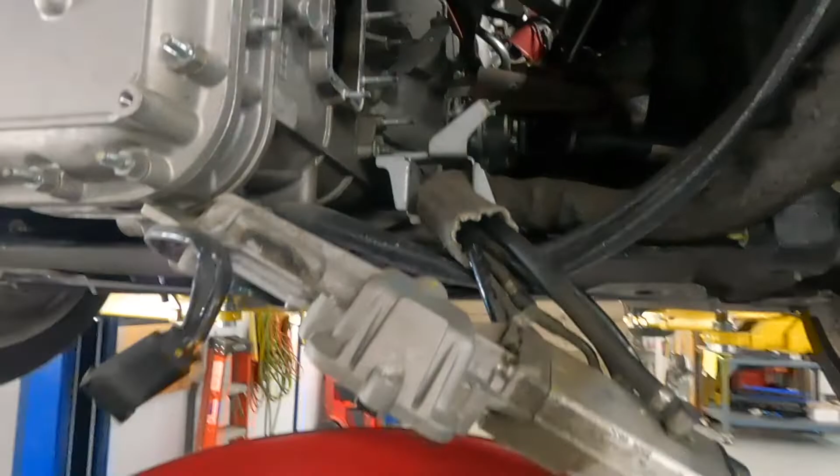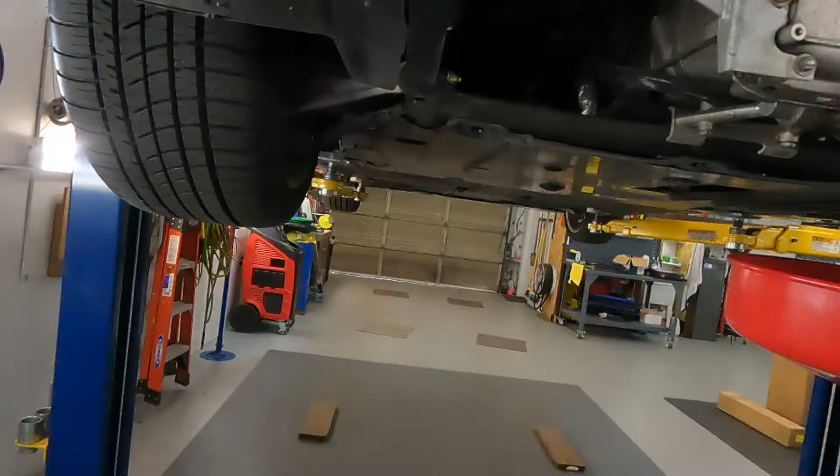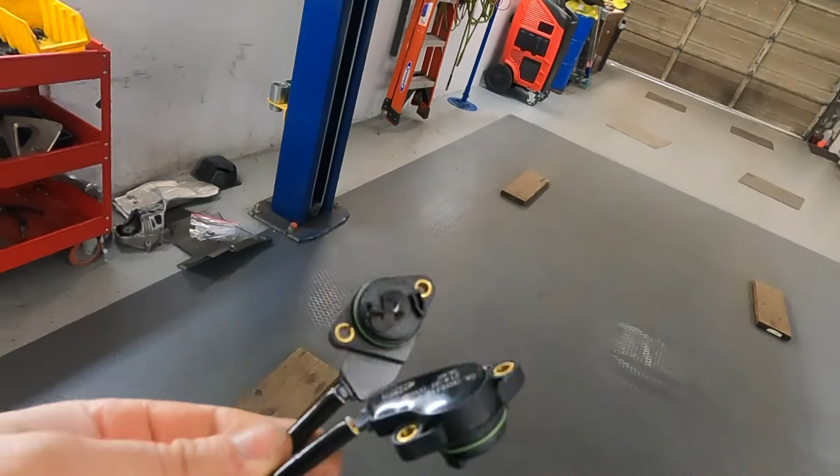Finally we got the part. Here's the parts, part number 248095. Let me unpack. And here's how it looks. Here's the kit, and here's the two new potentiometers. Now I need to take out the old one and then install the new one.

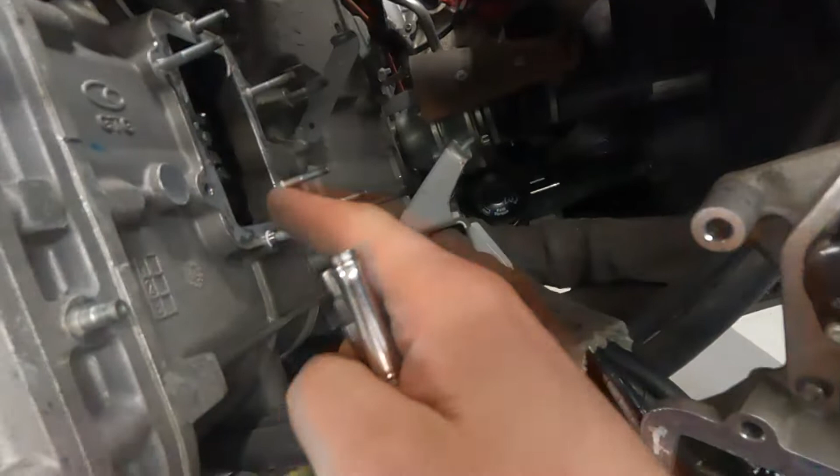Now it's time to clean this surface and this one, apply silicone and tighten the actuator to the transmission. Potentiometer, how I can... Potentiometer? Potentiometer, okay. It's already in.

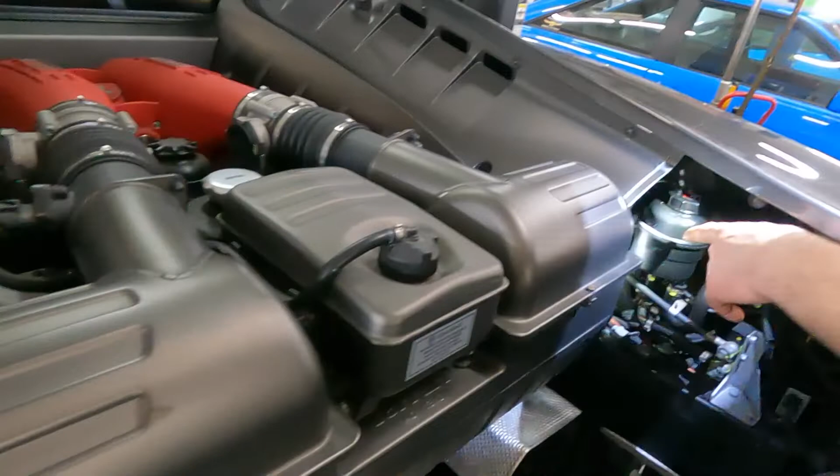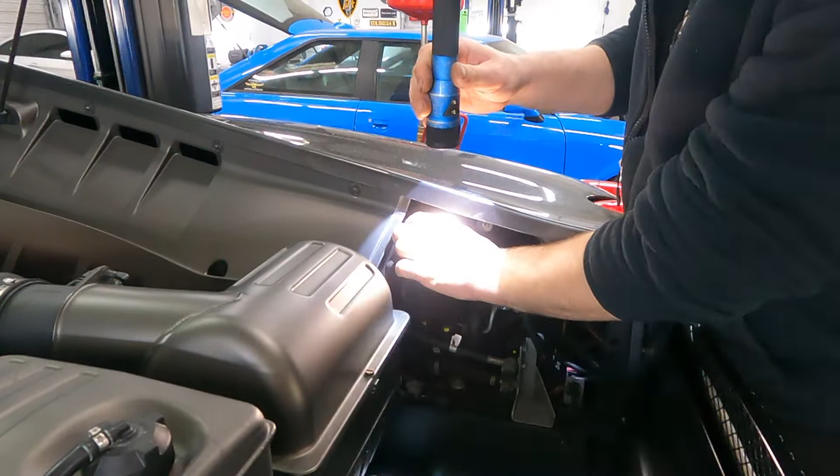Now I would like to show you guys how to do an F1 fluid flush and how to adjust the level properly. Okay, go to this side. Let me show you the reservoir. This is the reservoir. The car has been sitting since this morning. Yeah, we moved that car in the morning. Now it's been sitting about 6 hours. And let's see the fluid level. I see this is wet all around. The fluid is a little bit up.

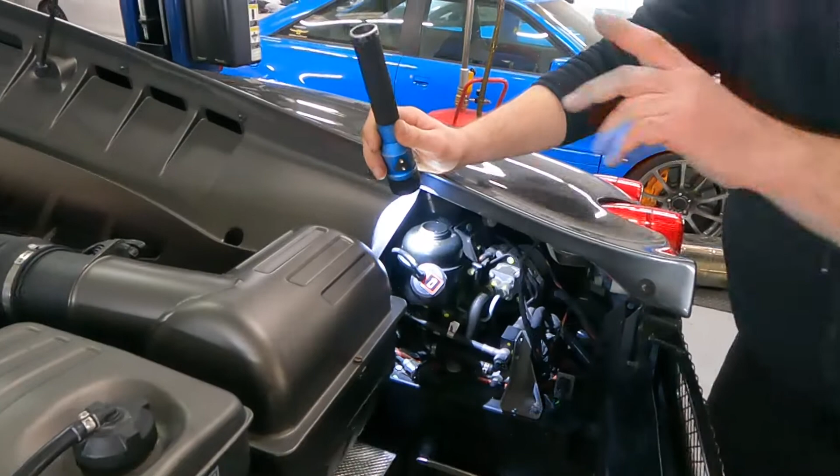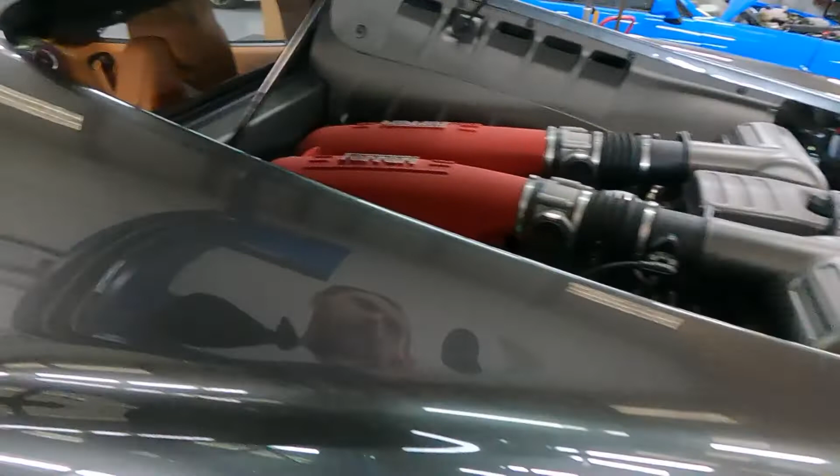Oh, yeah, you can see this. For me, it's too much. This is not the right level. But let's open the door. Let's open the door. Ilya, somebody came to you. Let's open the door and check the level after the pump starts reaching pressure. Just open the door. Yeah, this is too much. I see that it's too high a level.

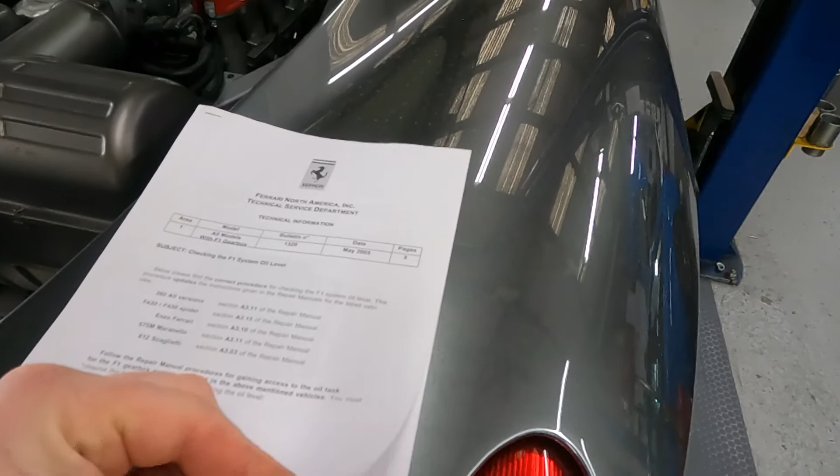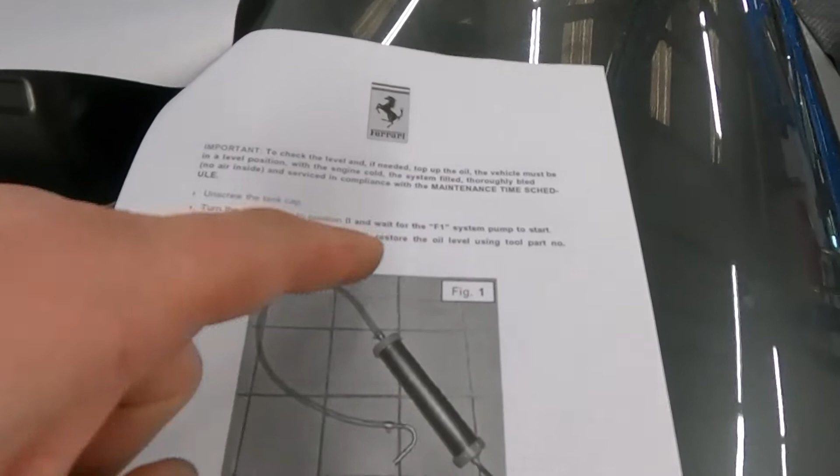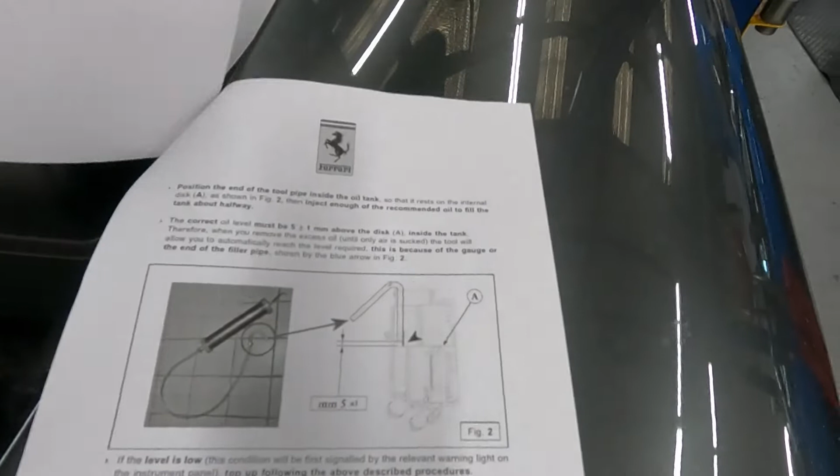Just like I printed the procedure, checking F1 system oil. In Europe they say oil, but we say fluid. Okay, unscrew the tank, turn the ignition key to position II and wait until the F1 system pump starts. Soon after the pump has turned off, restore the oil level using the tools. And here is the level. Oh, just let me fix these things. Yeah, here is the level, guys.

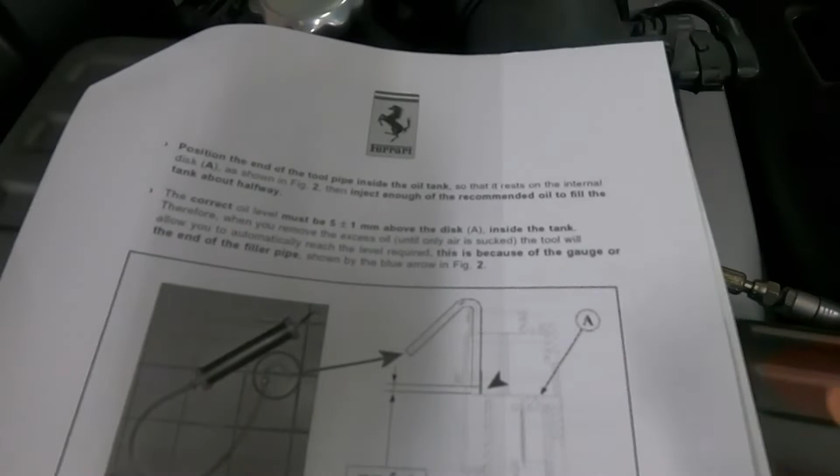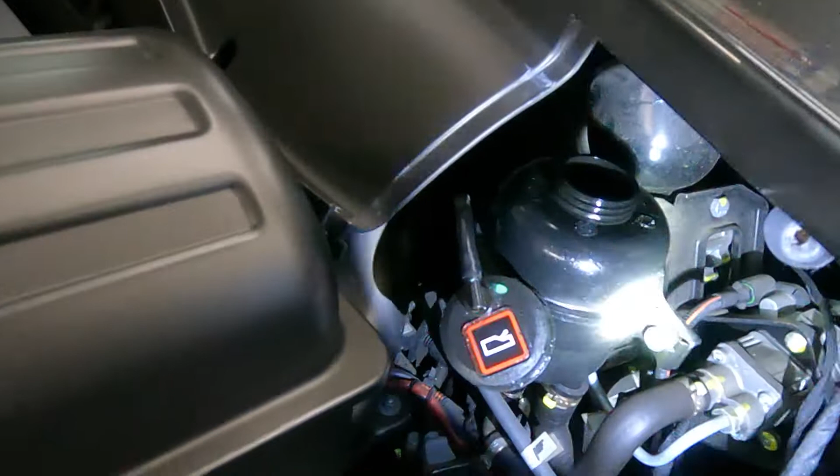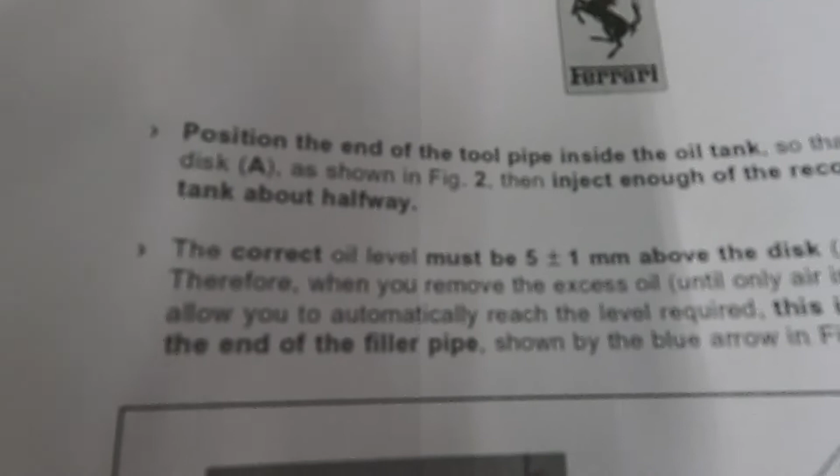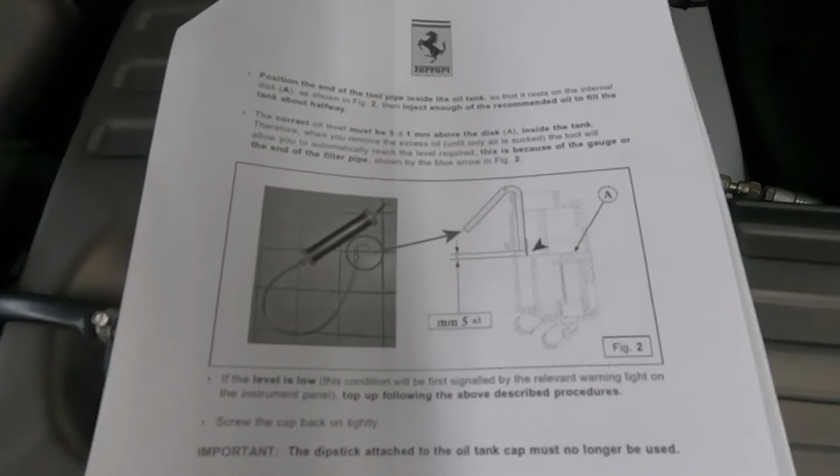You can see here is the reservoir over there, and right here in the middle there is a disc. And what does the procedure say? To correct the oil level, it must be 5 ± 1 millimeter above the disc. This is a special tool with a special hook. You just move it. I don't have that one because I really don't need it. I can adjust the level easily.

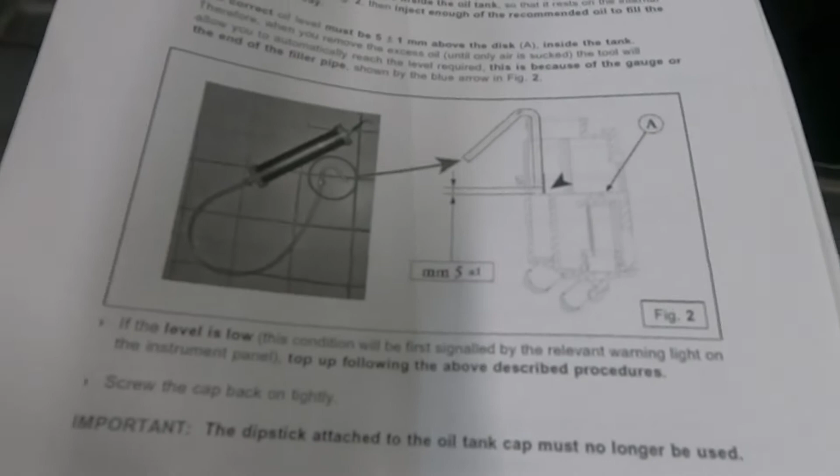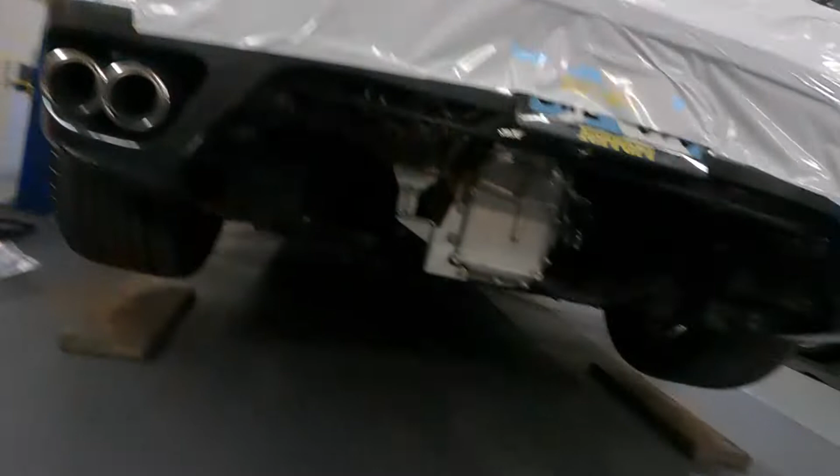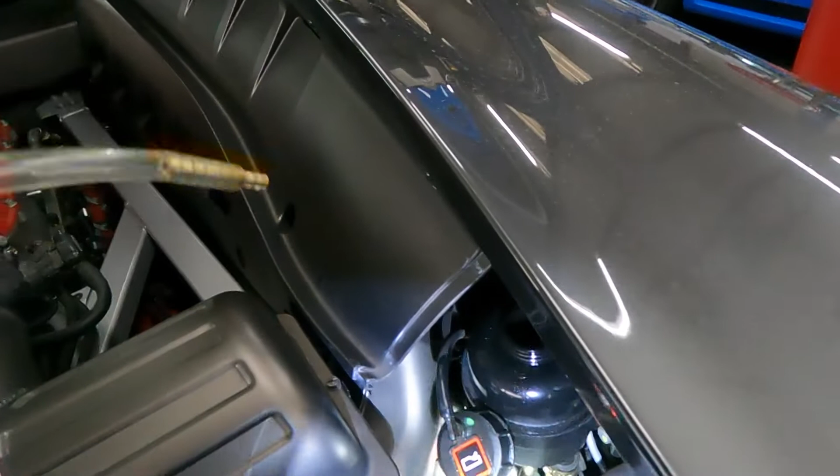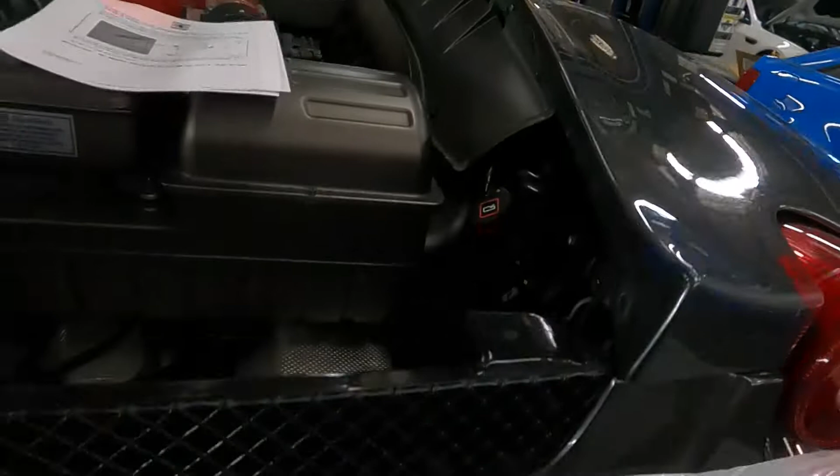And let me show you where that is. You can see now. Yeah, nothing deep. Let's evacuate a little bit of fluid, and you can see this guy. Oops. Do not scratch. Now you can see that disc, right? Let me evacuate a little bit more. Yeah, now you can see that disc, guys. And this is actually the level. Let me turn off this bleeder. Yeah, here is the disc, and it must be 5 millimeters above the disc.

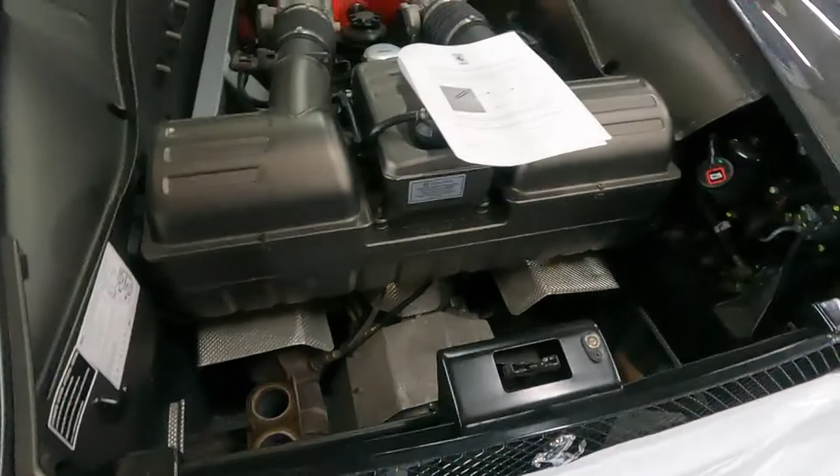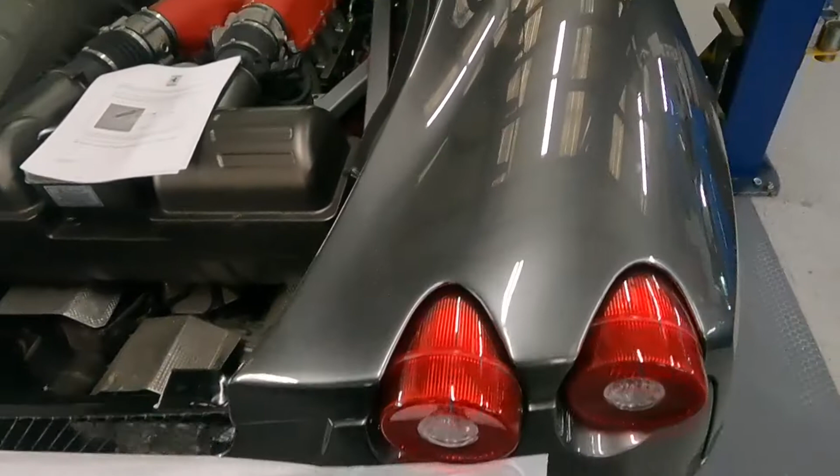And when this pressure is like, let's open the door one more time. Yeah, now it's a little bit low, but of course after we bleed, we add fluid, and I would like to show you how to bleed it. Just carefully lift it up.

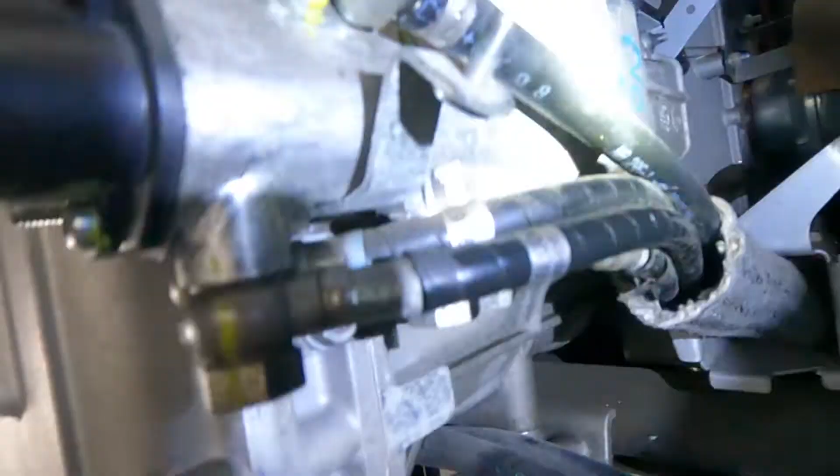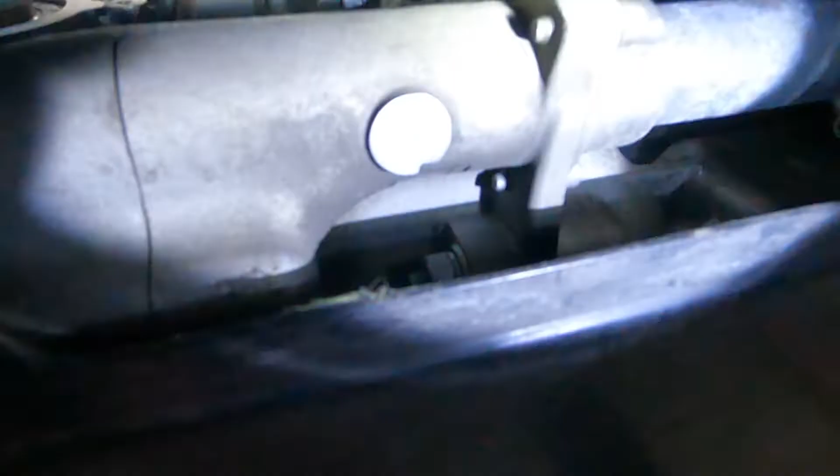Okay, here I already installed the potentiometer, and here, let me move. I think I can show from this way. Yeah, here is the bleeder valve. We can bleed the clutch and bleed the system. Right here, right here. Yeah, this is the bleeder screw.

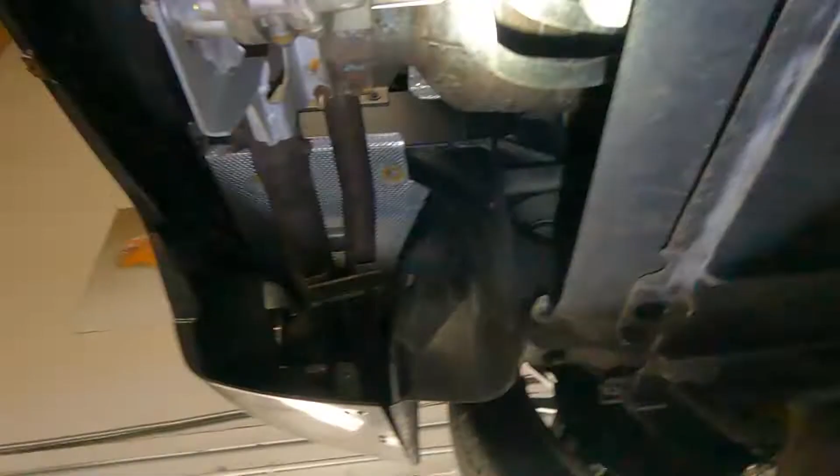What we need to do, I'm sure you can use, guys, simple tools like X431 or Autel for bleeding. We use Leonardo, but I'm sure those two scanners can do the bleeding. It's just simple. You go into transmission and do the bleed procedure.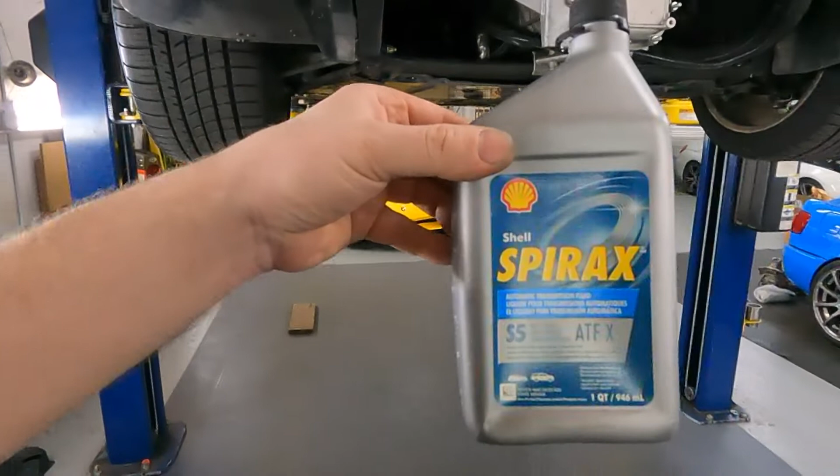And here is the type of fluid I use, guys, and this is what Ferrari recommends. This is Shell Spirax S5 ATF X. It's possible to buy it, no problem. It's not that expensive, something around 40 bucks a quart, and you don't need more than a quart. I think it's enough for bleeding. And one more time, guys, make sure the fluid level is correct, because if you overfill, it starts throwing up from the reservoir. Now let me finish the bleeding procedure, and then I'll do the adaptation test.

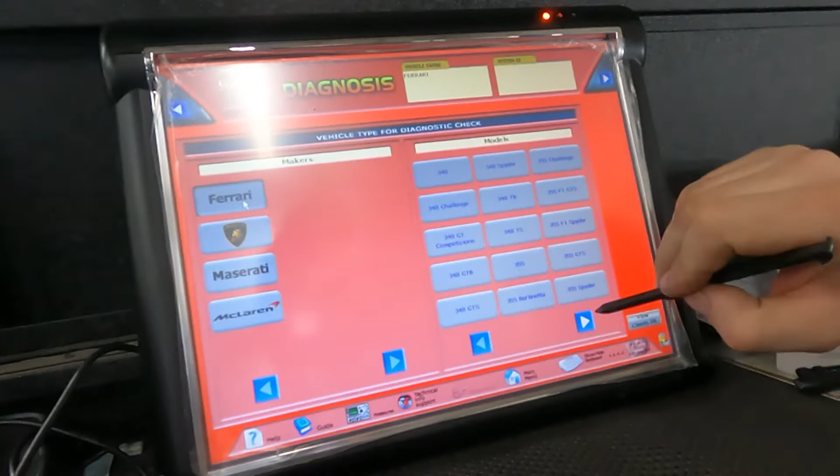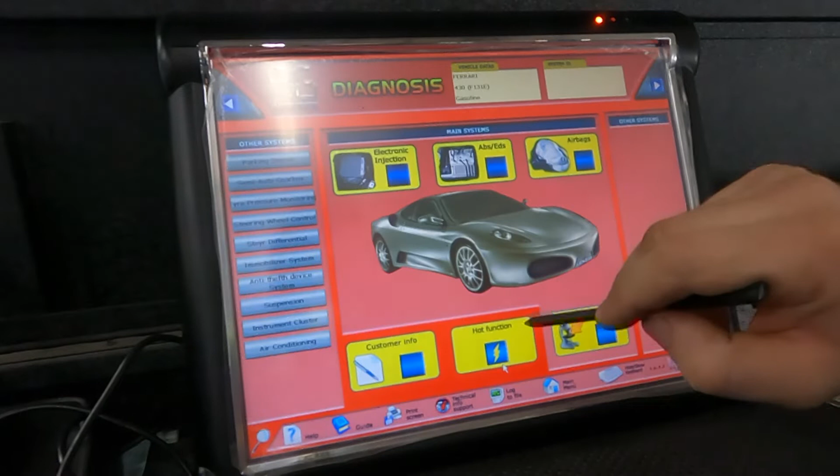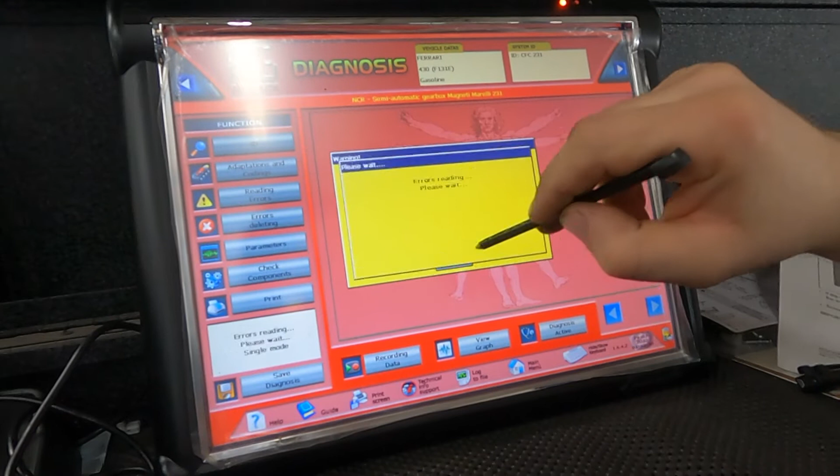Okay, now I need to do adaptation. Let's go first. Delete trouble codes. Yes, of course, always connect the charger and keep the voltage. Okay, gearbox. Yes. And then we go into read errors. Yeah, we have a potentiometer one. Delete. Okay, nothing, and go into adaptation.

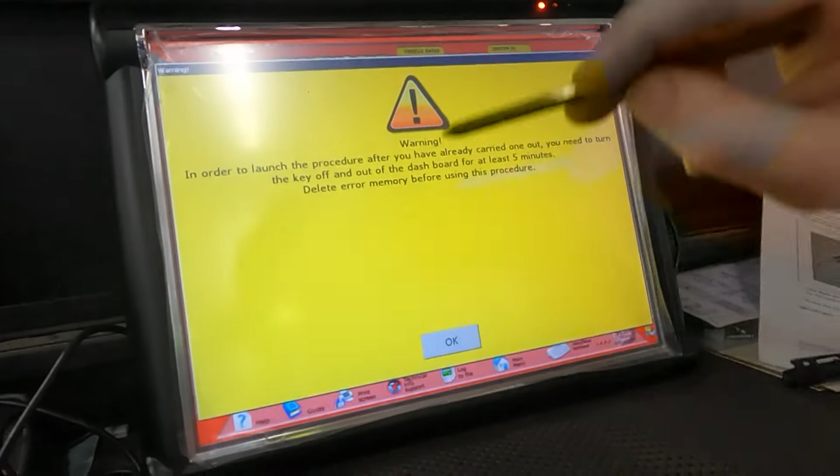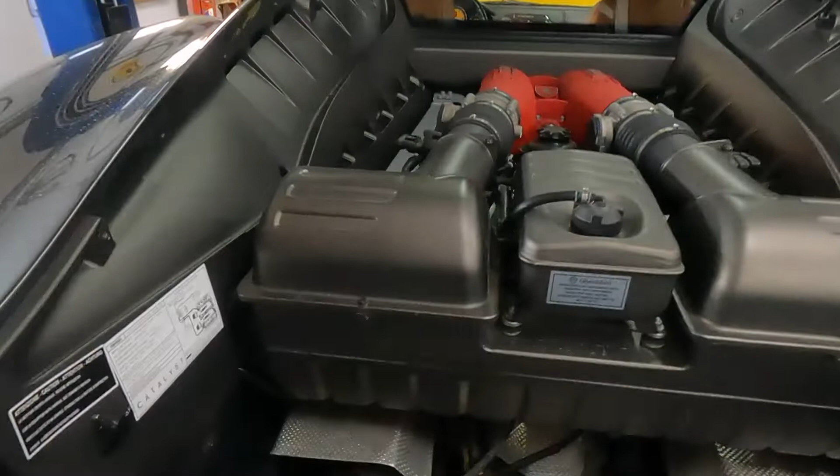Yes, and this is the clutch bleeding, and this is actuator bleeding, and we need the self-learning test. Okay, we would like to start, and you can hear how it starts clicking and shifting gears. Second, third, fourth, and then we wait.

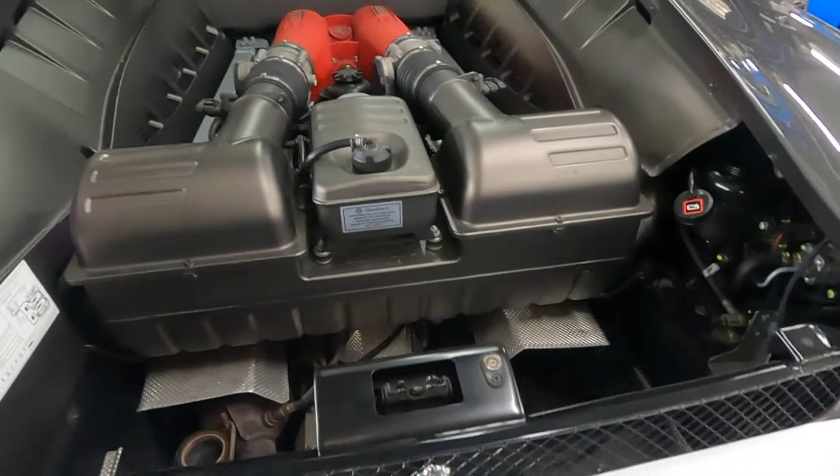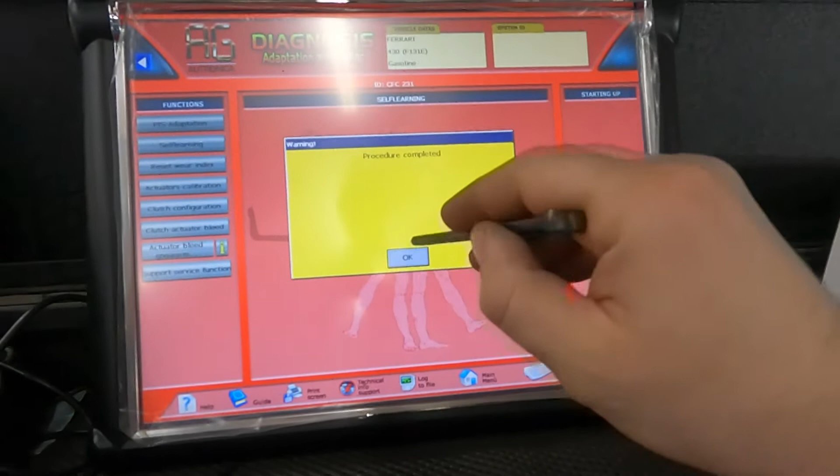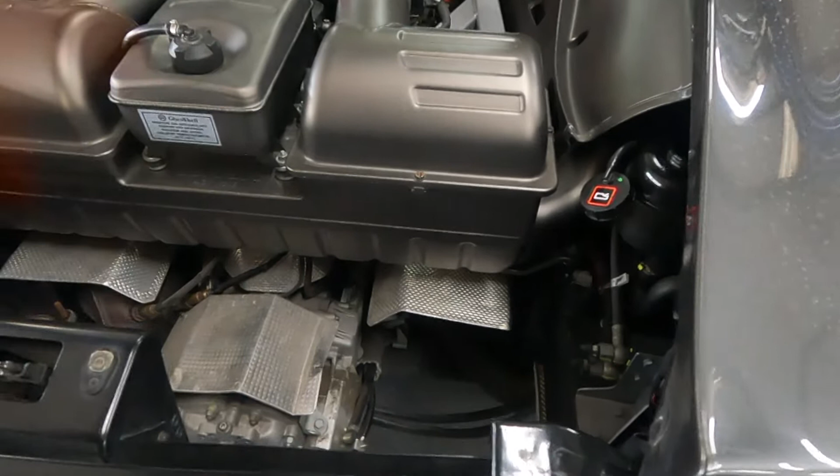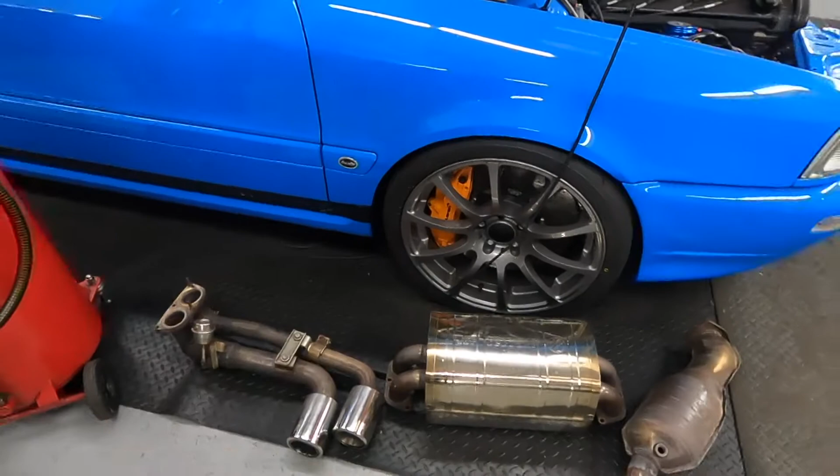What we need to do, the last few things, we need to install exhaust first, downpipe, then few muffler, no, not muffler, yeah, we need to install the downpipe first, then this elbow with the tips, and then muffler. Retorque everything and take that car to test drive.

Hello. Today we start work on two cars. First, the first Gen R8, and that car is really cool because you can see inside. It's a pleasure. It's a manual. Gated manual. It's manual transmission. It's almost brand new, some 10,000 miles on this car. And of course we need to install what? Right, exhaust. This is first mod on this car. I think it's last mod because why?

This car, everybody remember, now actually that car changed the color. This car is very different. Why? No, the color on the camera, they don't get that. It's different. Maybe same as that Laguna Blue. Yeah, could be.

Exhaust again, we start to make our in-house exhaust, and we need this car to start doing the race high flow race titanium and stainless steel pipe. We wanna pull out the rear bumper, all stuff to start making the conductor for exhaust. It's not brand new, it's 2020. 2020?

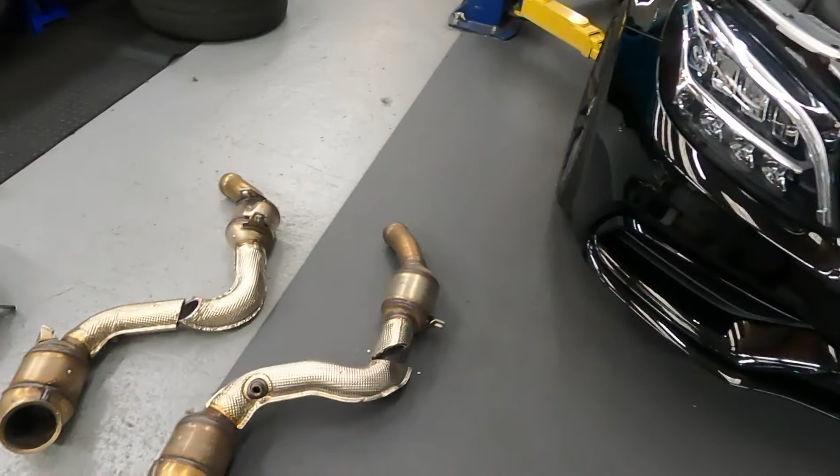No, today is Saturday, tomorrow my last day before vacation, but I still need to finish some Mercedes with the German plate. Yes, this is C63, and guys, we cut downpipe and we need to install another one. The customer decided just to cut it to avoid transmission removal and installation. He said, please just cut it, I don't need this downpipe, and save more money.

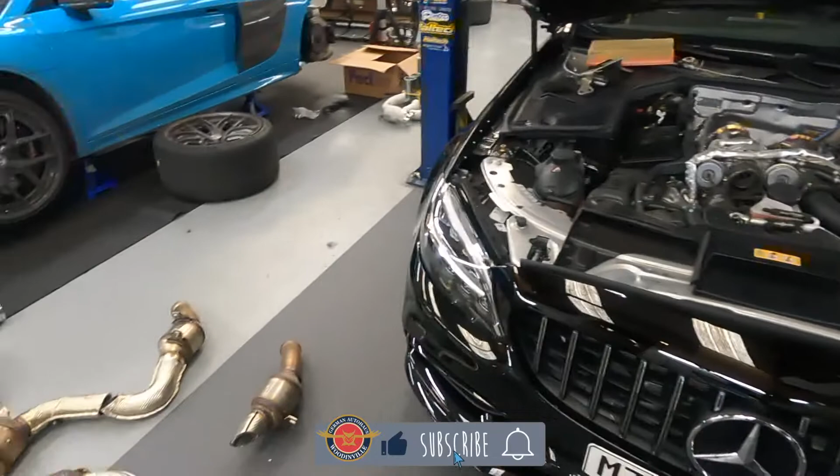Yeah, I'm almost halfway. Now I need to install the aftermarket one and make sure everything is good. I'd like to make the sound clip when I finish, because that downpipe is a high flow downpipe.